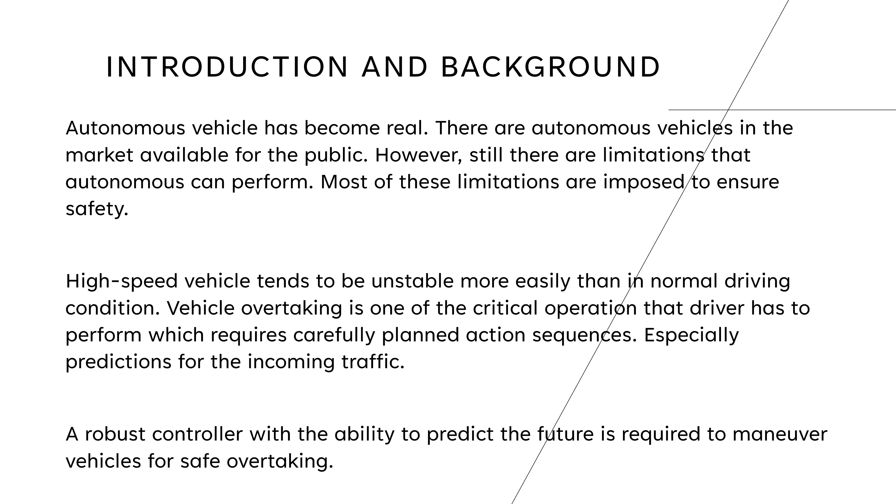So if you want to automate this process, you have to have a controller that can predict the future as well as be robust for different unseen scenarios. So in this project, I'm going to use a model predictive controller to derive a vehicle overtaking system. So I formulate the problem in a simpler fashion to understand the MPC control and apply this MPC control on this problem to overcome the prevailing problems.

So in this system, I assume my traffic is dynamic. It goes here and forward and backward. However, it doesn't change the lane suddenly. There's no abrupt changes or movement in the system. As well as I don't give a path to the system, only the goal state. The controller decides the best trajectory that it should take to go through the system. And also I'll demonstrate different scenarios to show how robust my system is.

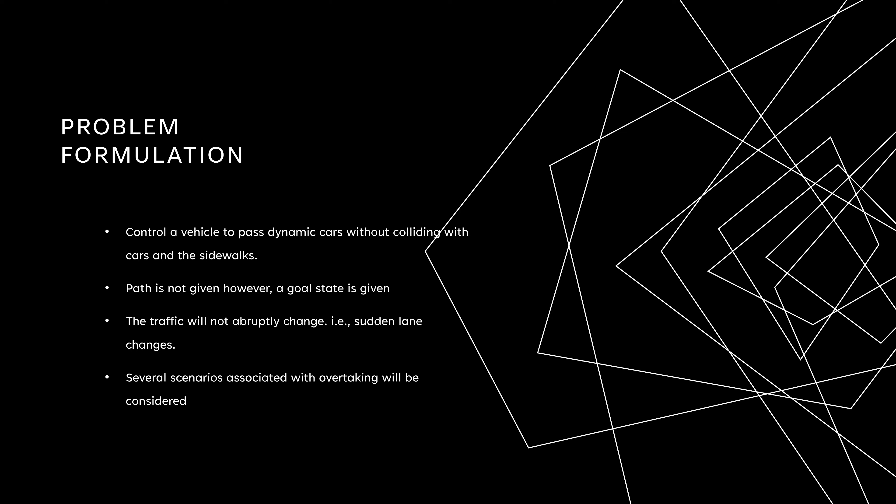So before going to the model predictive controller, let me talk a little bit about the first step of autonomous navigation, the path planner. If you have a controller that does path planning and controlling both at the same time, model predictive is one kind of controller, but there are controllers that only control the vehicle. You have to provide the path separately to the controller.

So there are very widely used path planners like Dijkstra and A-star, which are optimal path planners. It searches through the entire space and provides you the best path, but is very inefficient. It takes a lot of time to compute the path. Then visibility roadmaps and RRT are useful real-time path planners, especially for obstacle avoidance. They consider the obstacle and plan the path, but they are not optimal. It can be suboptimal paths.

Other than these standard algorithms, there are optimization algorithms like genetic, particle swarm optimization and ant colony approaches to figure out the best path for a given condition. Then artificial potential field, widely used in the autonomous navigation field. It creates artificial potential field hills, and the vehicle drives away from these hills. It basically keeps the vehicle on the flat terrain.

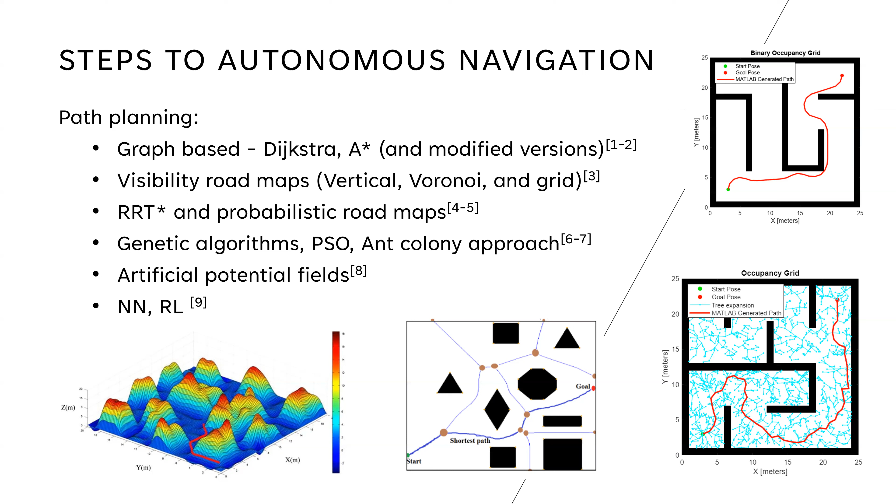And then neural networks, reinforcement learning, and other machine learning algorithms. There are a lot of machine learning algorithms to develop a path planner. Basically, they approximate the environment and the best path. So now I'm going to talk about some controllers.

In this project, I consider 8 autonomous vehicle controllers for autonomous navigation. PID is the first one anyone should talk about because it's very easy to understand, easy to implement, and also it's a real-time controller. But it's only suitable for linear systems. It has difficulty controlling nonlinear systems, and it's also not very robust. It can't handle high noise, but you can modify the PID controller to handle noise. It's very powerful, but not for complex and highly nonlinear systems.

Pure Pursuit is the oldest version of vehicle control. It's mainly used for missile controlling. It basically gives you a very smooth path towards the trajectory. So if you are away from the trajectory, it looks ahead from the vehicle to the trajectory and drives the vehicle towards the trajectory in a smooth fashion.

It's a real-time controller, very fast, and you can make it robust if you define the path and the system well. However, it has difficulty with hard corners, for example, 90-degree corners or more; it's very difficult to take the vehicle along that path.

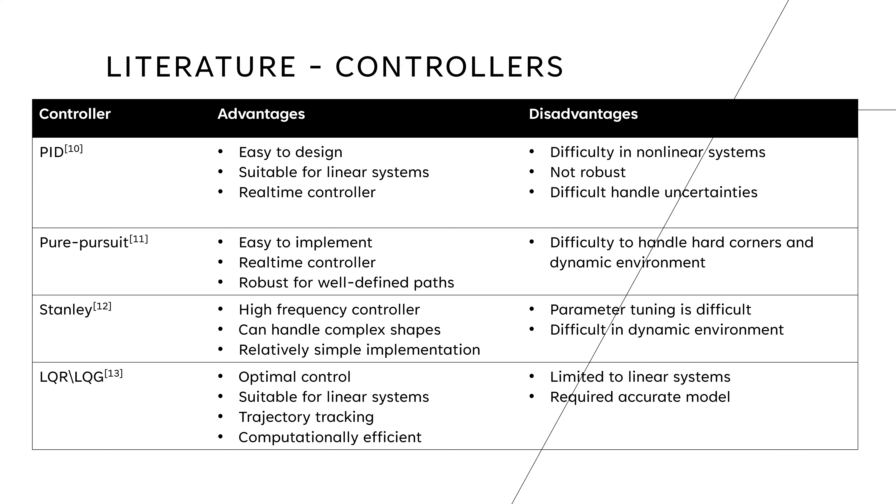As I mentioned, it needs a linear transition, so it's limited for non-linear systems. You can modify it for non-linear systems, but you need to have a very good, accurate, linearized model of the system. Otherwise, it tends to give you unstable outputs.

So value iteration is actually the basis for LQR, linear quadratic regulators, and Gaussian, and it is also optimal. Value iteration is also an optimal controller and easy to formulate. You only need to set up the states and the value function. If you want a continuous value function for continuous space, you can have a neural network or something, and everything else you can use a table for value iteration as a policy.

It actually gives you a policy. It says, okay, if you're in this state, this is the best action you should take to go in this direction. And there are a couple of others like finite horizon and infinite horizon value iteration systems. And this is computationally very inefficient. It takes a long time to compute because it looks at all the possible states and all possible actions and finds out the best one.

So next comes a very famous controller, feedback linearization, which is used in a lot of systems. Highly complex nonlinear dynamic systems can be controlled by feedback linearization, especially soft robotics, deformable robots, and other complex industrial plants. But it needs an accurate dynamic model, which is very difficult to model. If you have a dynamic model without uncertainties included or any other stochastic nature of the system, then it tends to be unstable and gives you weird results.

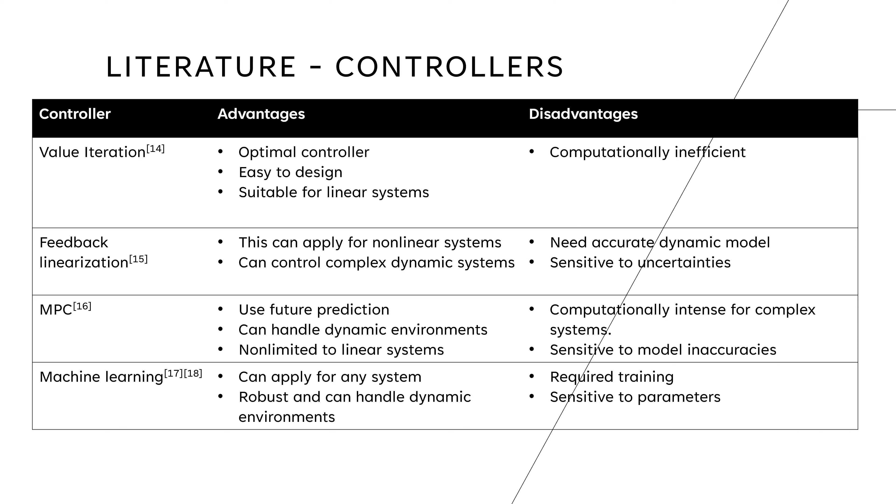Now I'm going to talk about my system. So here I consider my four wheel as a bicycle. It collapsed two wheels together, and as you can see, it's basically a bicycle shape, and this delta is the steering angle, one of the input, and psi is the heading angle, one of the state, and v is the velocity, and x and y is the global position of the vehicle.

In this case, I consider the point of interest or the center of gravity of the vehicle as a rear wheel so that I can eliminate the beta, the slip angle. The reason I eliminate the beta is because it gives me a hard time when I derive the Jacobian. I used a Jacobian for this state space to improve the optimization speed, the accuracy. So it gave me some difficulty when deriving that one and ill conditions. Therefore, I decided to keep the center of gravity here to eliminate the beta angle.

So L is the length of the vehicle, which is 3.5, and this is my continuous state space. Nonlinear model predictive control in MATLAB. That tool is basically a discrete tool. We use a for loop to calculate. So I thought, okay, a discrete version will be a very good and easy way to implement my system inside MATLAB, because I implement all my functions and stuff in MATLAB, and I developed my own simulation environment to simulate the predicted result, calculated result.

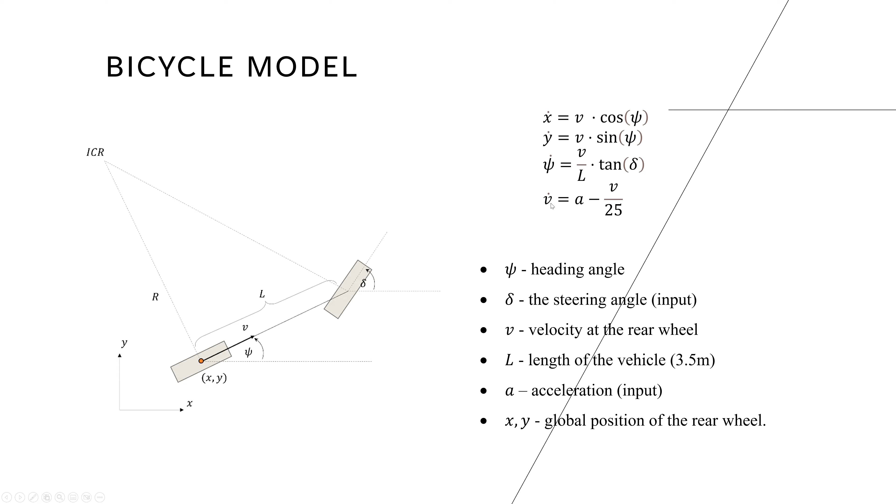So this is the discrete state space, and as you can see, this V by 25 is a damping that kind of simulates the air drag as well as the friction drag from the floor when there's no input. It tries to reduce the velocity to zero, basically regulate the velocity. So these are the state Jacobians for the state space with respect to states as well as input. So I use these two matrices, these two functions in my optimization.

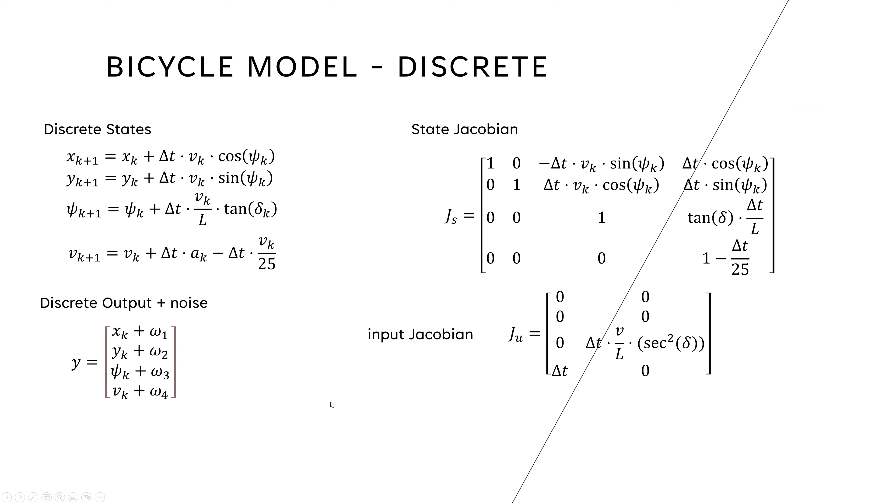So output is a full state, but it has some noises. I scale these noises appropriately to match with these scales. These are X and Y, varying from 1 to 50, 60. So this W1 and W2 vary from 1, 0 to 10. And psi k is within 0 to pi by 3. Sorry, pi, that means 3.1. So this W3 actually varies within 0 to 1. And VK is also similar, 0 to 10, 0 to 1, because VK only varies within the 0 to 5 range.

So my weight, I gave high weight for the x and y because I want to control the position of the vehicle a little bit. I want to keep it in safe distance and control it. And my heading angle and the velocity have low weights. That implies I am not kind of interested in those variables. And my R input, I give high weight for the acceleration and low weight for the steering angle.

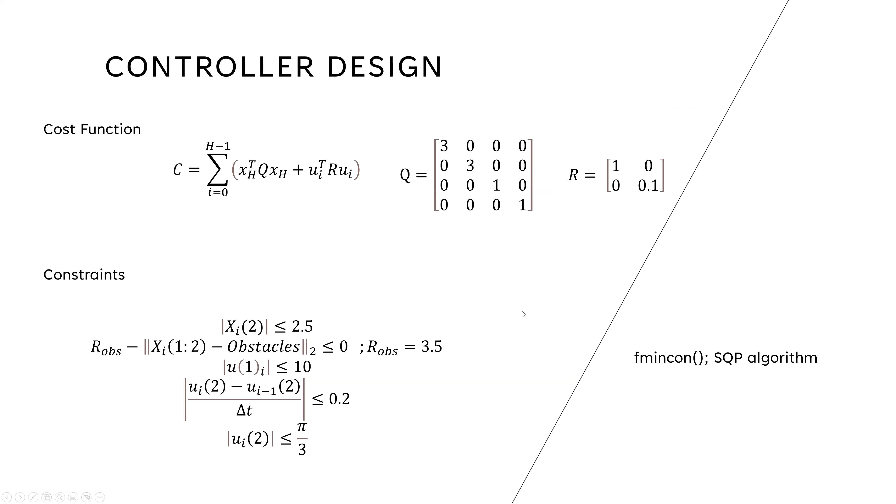So this controller uses fmincon as a constrained optimizer, and in that optimizer I use SQP, sequential quadratic programming, to use my Jacobian to calculate the Hessian and the Lagrangian multiplier to compute the best direction to search, and it's very fast. So these are some of the results. As you can see, this is a 10-step horizon. It looks 10 steps, and this is a 5-step horizon.

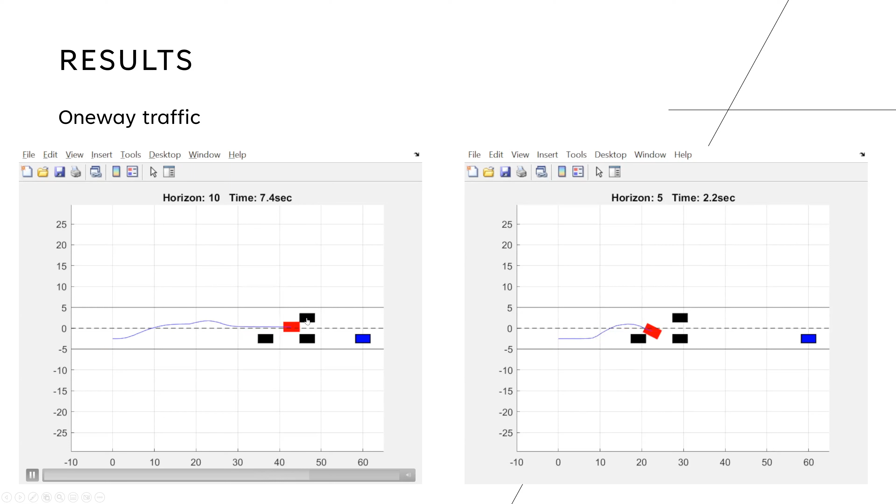You can see the 5-step horizon has some jerky effect because of the less foreseen thing, I would say. So the vehicle does not collide with the other vehicles, and it keeps maintaining its speed with the other vehicles because of the constraints, and it tries to go towards this goal location.

These are some other effects that I want to show, to show the robustness of the system. As you can see, in the 5-step horizon, it parks the vehicle without any issue when there are other systems. And with the 9-step horizon, yeah, it's more smooth. It takes the turn a little bit before the vehicle, as you can see. However, when the step horizon is 10, it gives me this weird result.

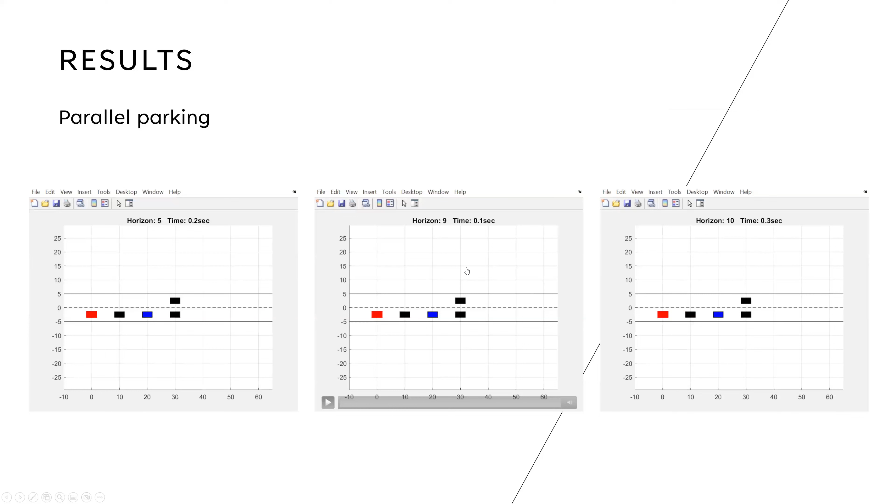This is, I believe, because my Jacobian may be ill-conditioned, and it results in a bad Hessian matrix and Lagrangian, which drives the search in a wrong path, and also that Jacobian is used to handle the constraint. In this case, yeah, it clearly violates the constraint. It goes away from the boundary. So, however, I'm a little confused that only the 9-step horizon works, but the 10-step horizon doesn't work.

So these are different scenarios to show the performance. This is the same MPC controller, the same cost, same constraint, only the goal state is different. As you can see, you can park in any angle, parallel or vertical parking. So this is to show how the controller works when a sudden object appears. It figures out there's a sudden object and takes a sudden turn to avoid that object. This is actually kind of cool to see.

So this is another way to show the controller robustness. This is the goal location, but it realized that it can't go beyond this point, so it stopped the car and keeps the distance. It seems like it collides, but it doesn't actually. But yeah, that means the system knows, okay, I can't go beyond this point.

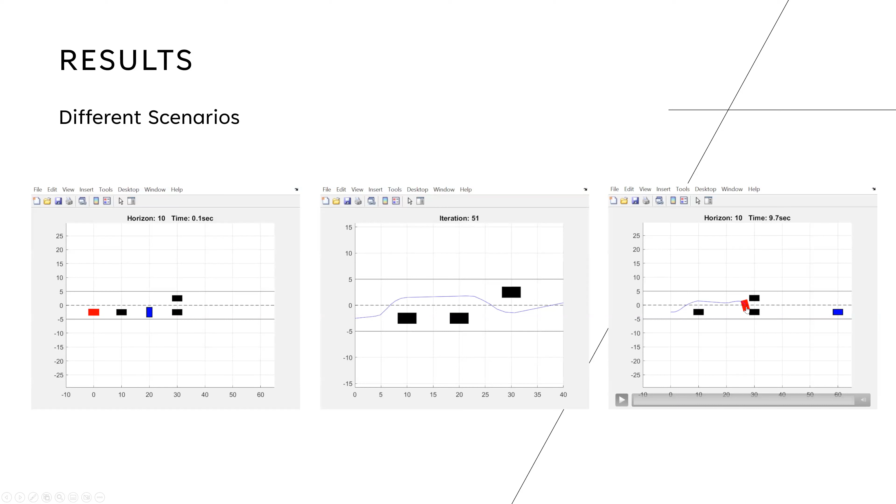So what I learned: I got a way better understanding than my previous knowledge about MPC. I learned how to formulate my problem as a nonlinear model predictive controller, what happens in a nonlinear model predictive controller, and how the optimization works. And I realized that a bad model can give you bad results, especially this ill condition, as I demonstrated before. Also, I realized that the parameters are very important when it comes to a controller. You have to figure out proper parameters so that it gives you the correct value.

So I had to tune the weights, because if I give the same weights throughout the system, it gives me the wrong result, and it gives you a very jerky path because you try to control the direction as well as velocity. Also I learned how to derive my own simulation in MATLAB and how to write an MPC controller without using a Simulink model or something, just coded in MATLAB, which gives me an in-depth understanding about the control and how to add my own constraints, my own cost functions and stuff.

As a conclusion, my main conclusion is MPC is very robust, it's very powerful. I developed this controller with a simple cost, and I have some real-world emulations like damping as well as these noises, but still the model predictive controller managed to give me good results for various different scenarios. It's true that I don't use a dynamic model, which might give me a hard time, but model predictive control is very powerful as long as you tune the parameters and formulate the system in a quadratic fashion, and it gives you the best result that it can give.